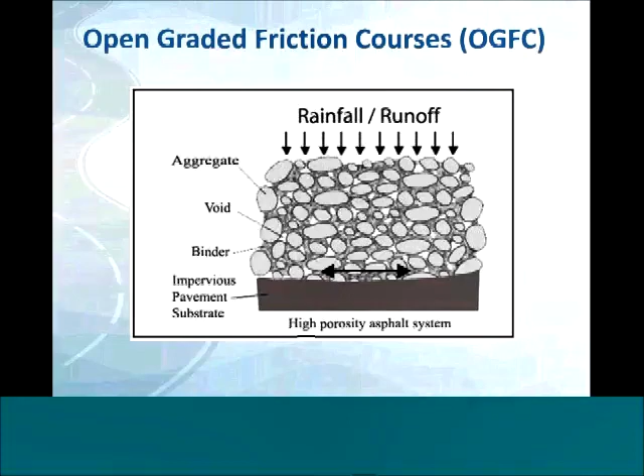The technical working group meets annually to determine the tasks that the center will undertake each year. And for the last two years, the technical working group has supported two communities of practice, one on environmental justice and this one on stormwater management.

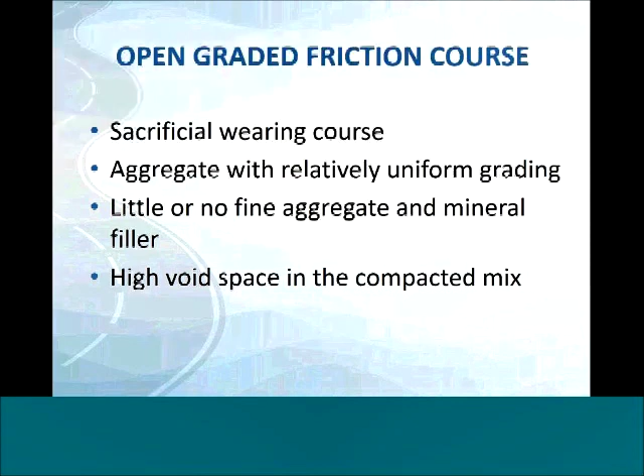The primary goal of both of these communities of practice is to provide a gathering point for practitioners on pressing issues and a way to regularly engage through webinars, conference calls, and other online forums in order to share best practices and lessons learned. Today's webinar is the first in a series that will be conducted in the coming months, and we're also preparing a white paper on the state of the practice that will be published soon.

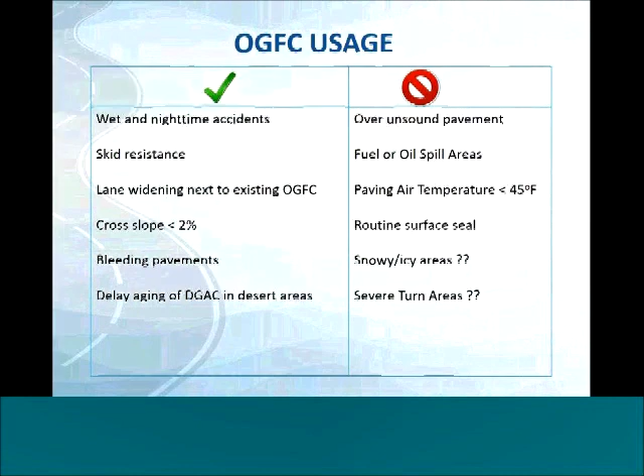This forum is made up of stormwater experts from various state DOTs across the country to offer a varied viewpoint of what water quality and stormwater issues are pressing in their part of the country. Federal Highway appreciates all the hard work and expertise the group has to offer in terms of stormwater and water quality. Again, thank you so much for tuning into this exciting webinar.

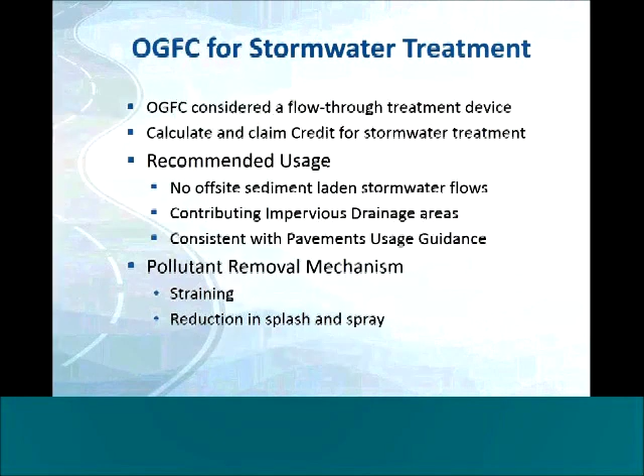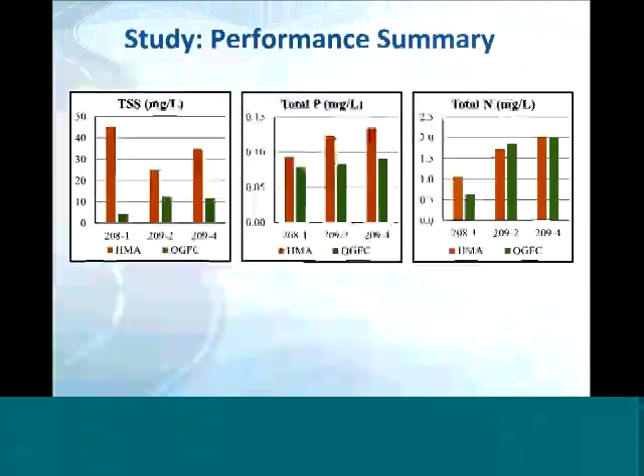For the next hour, you will hear from our presenters who will provide you with information on the effective, efficient, and innovative BMPs that their DOT stormwater management programs have explored and utilized. DOT stormwater programs have experienced increasing responsibilities spanning environmental and program planning, design, permitting, construction, and operations and maintenance. In this web forum, we will discuss innovative solutions that promote surface water quality protection.

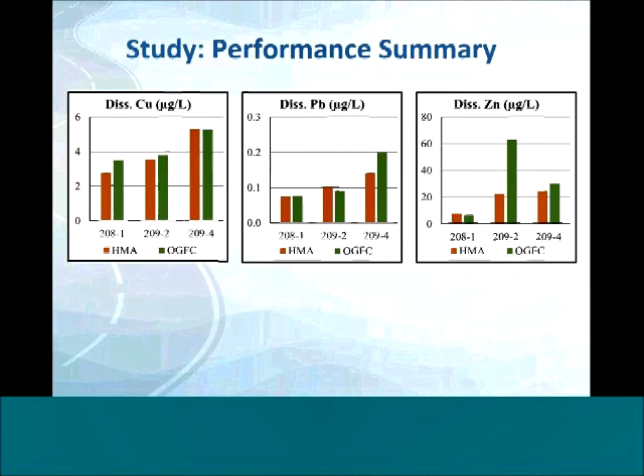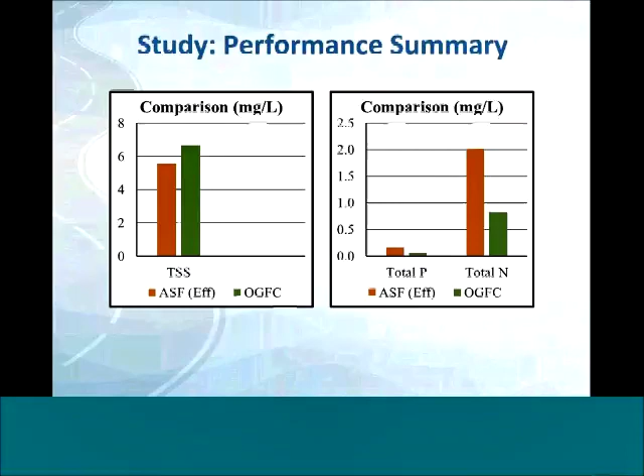During the web forum, we will cover open graded friction course, its benefits, usage, and potential as a water quality treatment BMP; innovative roadside BMPs that fit within the linear transportation system; the importance of infiltration and current research to support this treatment; and winter storm management practices that will measure performance for TMDL and regulatory requirements.

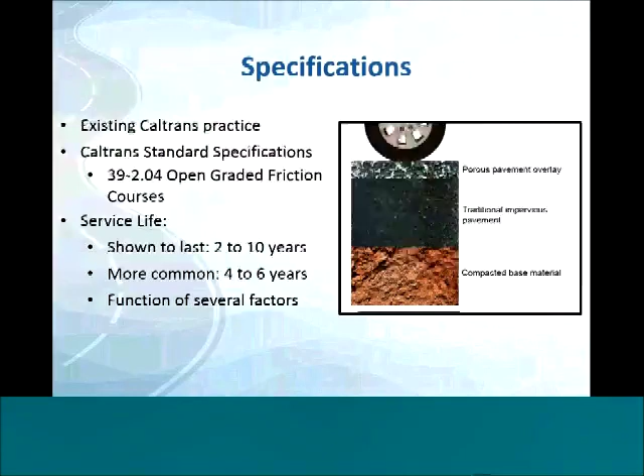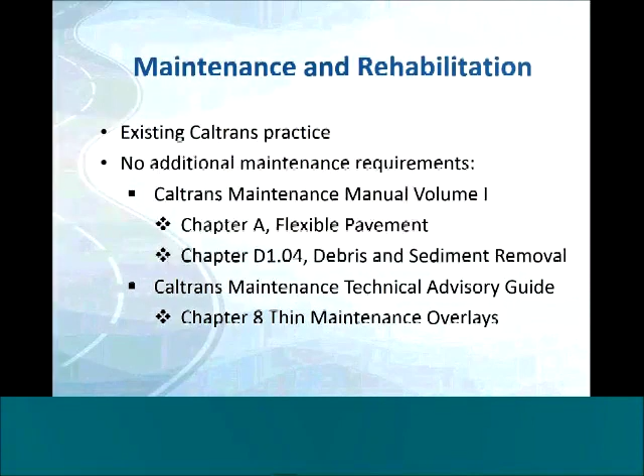Our presenters are Bhaskar Joshi with the California Department of Transportation, Gianna Ratcliffe with Washington State Department of Transportation, and Nick Tiedegan with the Minnesota Department of Transportation. I will be moderating today's session. For the next hour, we will hear the presenters describe their programs and then take your questions.

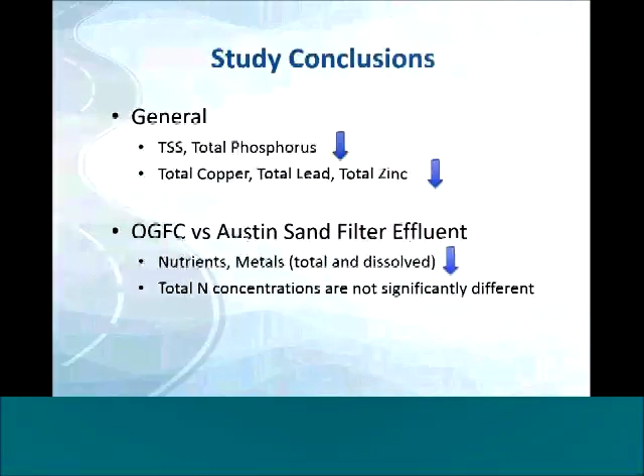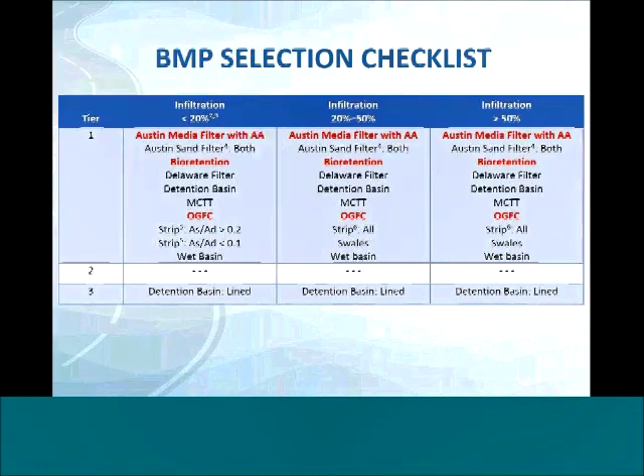So the first slide you can see now on the screen is almost a cartoon depiction of an open graded friction course, and it shows a fairly porous layer of asphalt on top of an impervious pavement surface, which could be asphalt or concrete. The way it works is when there is rainfall or runoff on the surface, it goes through the voids in the pore spaces, and then it laterally travels towards the edge of the pavement.

I'm sure you've all seen great photos of cars driving by on regular pavement and then on open graded pavement, and also experienced firsthand riding on these two types of surfaces. You can almost see nothing if it's a heavy rainstorm and you're driving on regular pavement, you cannot see anything, and then you go onto pervious pavement, and it's a difference of day and night. So that's how normally we experience this, but there is much more going on underneath.

As you see on the next slide, we have in California been using open graded friction courses for a long time, and we have a usage guide for open graded friction course. In fact, there are several thousand miles of open graded friction course pavement in California, and we have gone back and looked at how long we've been using this kind of pavement. It seems starting from the 70s almost, maybe even earlier. That's what our records show.

Next, if you see on the next slide, we have a lot of discussion on what are the benefits of this kind of pavement. You see roadway safety. It has good frictional characteristics, so your stopping distances are smaller, lower. You have high visibility during rainstorms. The contrast in pavement markings is higher, again, during rainstorm periods. Drainage is improved. Surface friction, of course, is improved. And then for environmental benefits, we talk about noise reduction, a lot of talk about noise reduction.

And then what about stormwater treatment? This has been a more recent phenomenon where people have been talking about this pavement also being deployed for improving stormwater quality. That's where this presentation is directed. A lot of studies have been done, and we have had experience in California with a study which I'll talk about in later slides.

As far as usage of OGFC, or open-graded friction course, or open-graded asphalt pavement, as it's also sometimes referred to - on the next slide, mostly this is common across various jurisdictions where OGFC or OGAC is used: for new construction, major rehabilitations, maintenance overlays, and generally where traffic volumes are high. Also, in our guidance, it should be used at least in moderate to heavy rainfall areas. Obviously, there is not much advantage to using it in a desert environment. Generally, it specifies that OGFC should be used for the full width of the travelway and extend out onto the shoulder at least 1 foot, and preferably all through the shoulder. So that's the kind of usage guidance we have.

Or in desert areas, to delay aging of the regular dense graded asphalt concrete, or DGAC. It's not to be used on unsound pavement or where there are spill areas with dripping oil or fuel from slow or stopped vehicles, which can damage the asphalt and cause it to soften. Paving temperatures are restricted to less than 45 degrees Fahrenheit, and it's not to be used as a surface seal.

In snowy and icy areas, there have been different opinions. In the literature, and in some jurisdictions, it has been used successfully in snowy and icy areas, provided you don't have heavy use of studded tires or intense snowplow usage, because that can cause deterioration of the pavement.

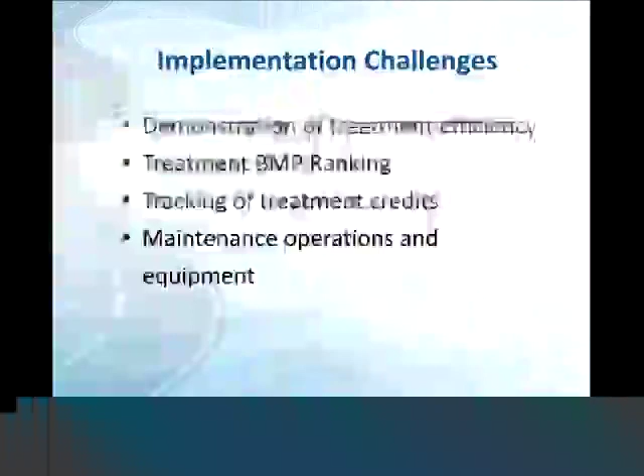Also, in areas of severe turning movements like ramps or parking areas, it might not be a very good use. Our guidance also requires that if you want to use this pervious pavement on a bridge deck, it requires special approval from our structures design people, although there is evidence in the literature that it has been used successfully on bridge decks. So that's as far as the usage guidance in our pavement section.

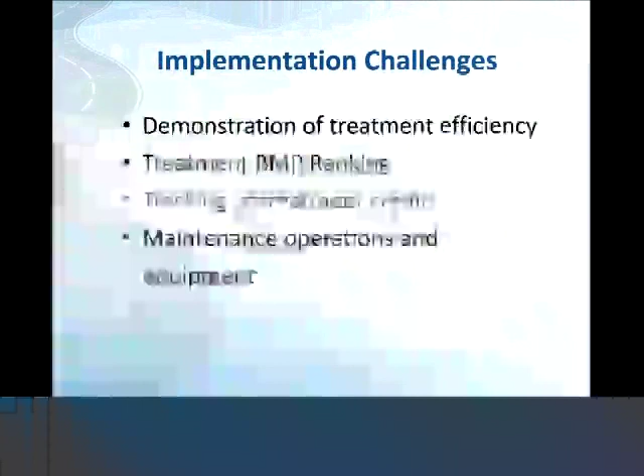Until recently, this guide, which also lists BMPs that have been approved for use, did not list open graded friction course as an approved BMP. So we did a study on open graded friction courses, and I'll talk about this study in just a few slides.

But it has recommended uses, like you shouldn't have sediment-laden stormwater flows or impervious drainage areas, and it has a recommendation saying it should be consistent with pavement usage guidance, which I showed you earlier a few slides back.

It talks about how open graded friction course is successful in removing pollutants, mostly by straining and reduction in splash and spray. So there is general design guidance in this manual now, and we have open graded friction course as an approved BMP in our guidance.

It's very valuable for us because in our current permit we are required to treat 1,650 acres of right-of-way annually, mostly in TMDL watersheds, which is total maximum daily load watersheds. This is a very difficult target to achieve unless we have innovative BMPs like OGFC, because we have restricted right-of-way and limited opportunities to put in structural BMPs everywhere.

While this BMP has multiple advantages, the approval process took a long time to convince people that this is indeed an option that has stormwater treatment benefits. We did a study on this open graded friction course. I'll talk about it next.

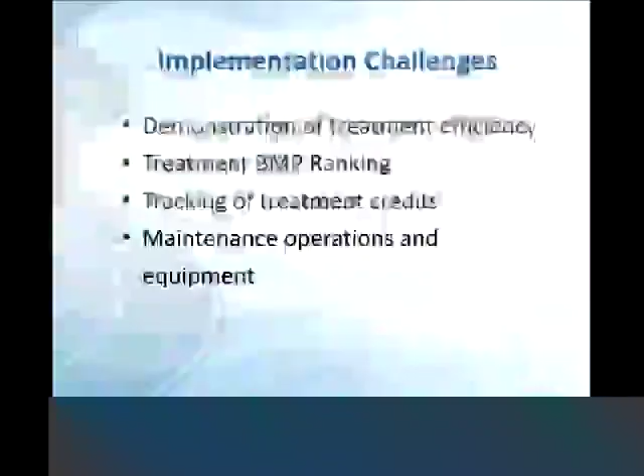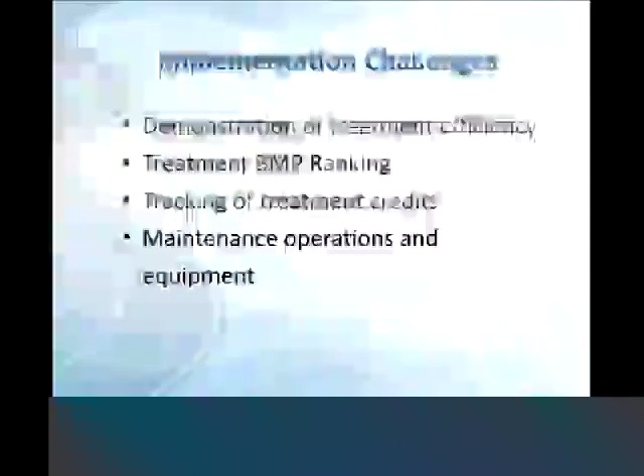But for stormwater quality benefit, of course, you would need to maintain it in some way. There are various options using either sweepers, or vacuum sweepers, or water high pressure cleaners, or there are specialized cleaning vehicles available, which, if you want to maintain the permeability over a longer period of time, is the kind of maintenance that would be needed. But regardless, even if it is not maintained intensively, it will function as a lower permeability stormwater treatment device, and that is something that could be investigated further.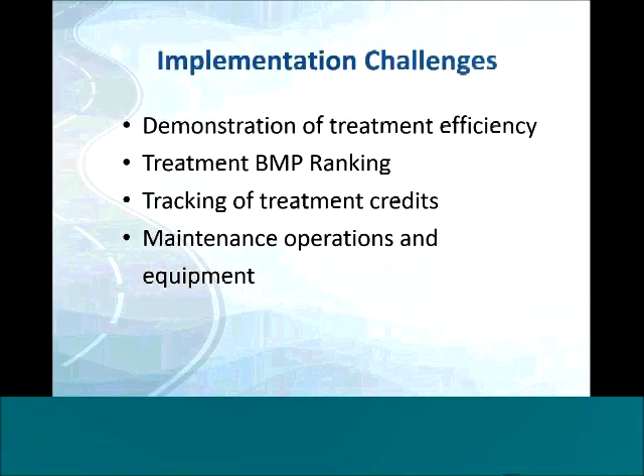Then there's the ranking of these BMPs, which I showed on the previous slide. It took us a considerable amount of effort to rank OGFC, should it be on tier 1, 2, or 3. This entire study, which lasted for 4 years, based on these results, we were able to rank it and place it in the selection matrix. That part is done.

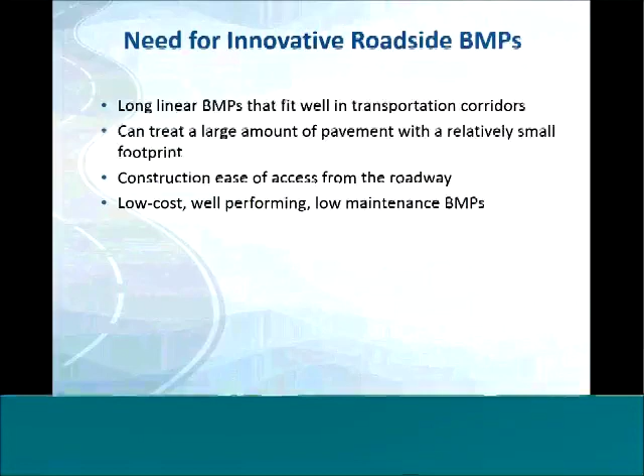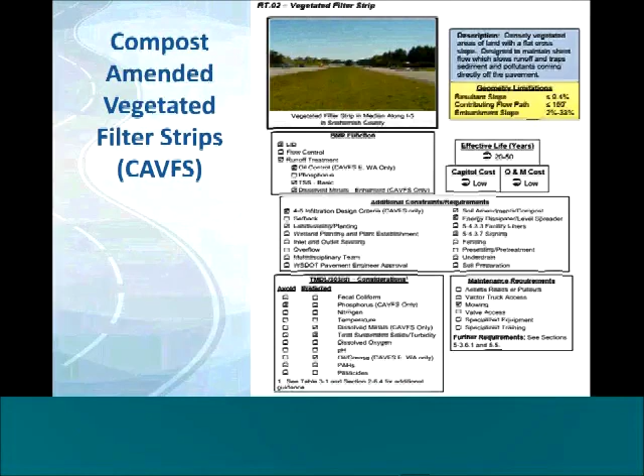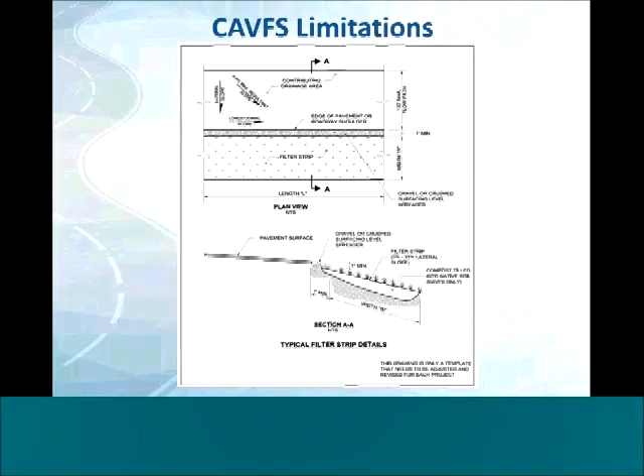Treatment credits: if you place OGFC somewhere in a TMDL watershed or even outside a TMDL watershed, you get some credit for treatment, or claim credit, and then how do you track it? How do you mark the BMP, where does it start and where does it end? And if you have to maintain or rehabilitate it, the division of maintenance needs to track where this BMP is that we have taken credit for. If they go in and remove it or replace it with something else, the credit has to be reduced from our treatment credit. So that tracking is still a matter of debate, how to do that and who is going to do it. How will we, over a longer period of time, make sure that where we place OGFC is not replaced with something else, or if it is replaced, then we know it has been replaced. So that is something we are still working out.

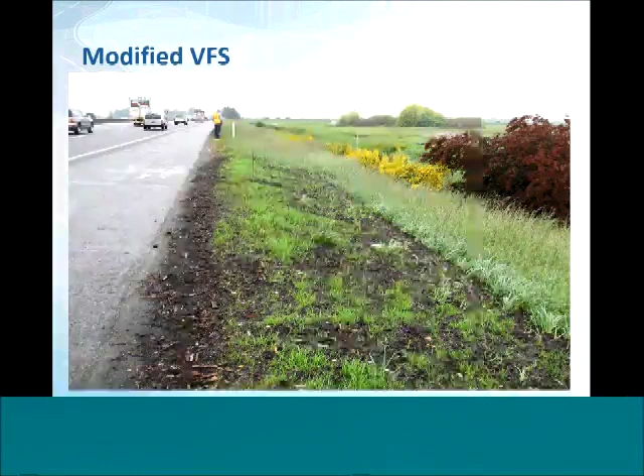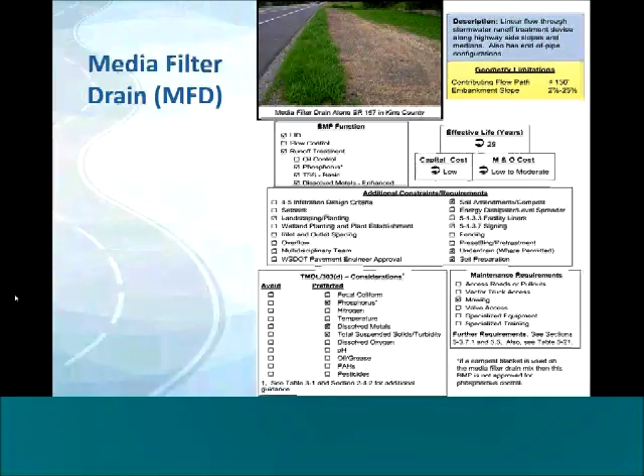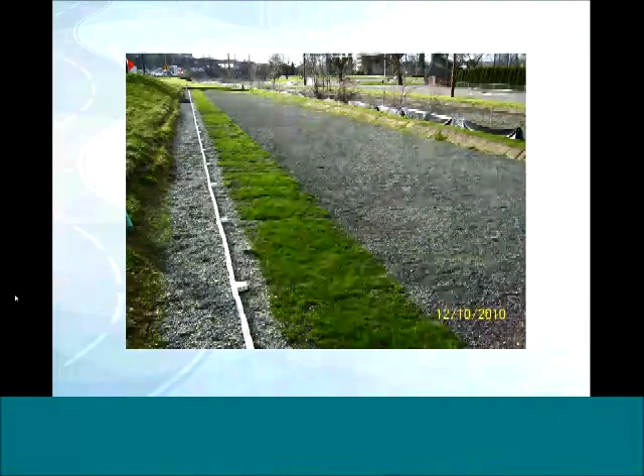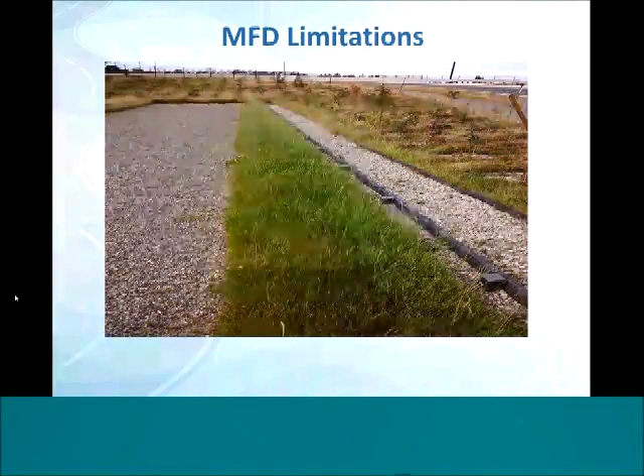And then the final issue is maintenance, operations, and equipment. What kind of maintenance operations are needed to keep this BMP functioning at the efficiency we claim it to be? If it gets clogged and is no longer functional, then we should not be taking credit for it. To make sure that happens, do we need specialized equipment? Is there a maintenance schedule that needs to be adhered to? And how do we keep testing after installation to make sure these BMPs function as designed? So that's the kind of challenges we have in front of us, although the BMP is approved and has been proven effective for stormwater treatment not only in California but in other jurisdictions, not just in the United States but also in Europe and other places around the world.

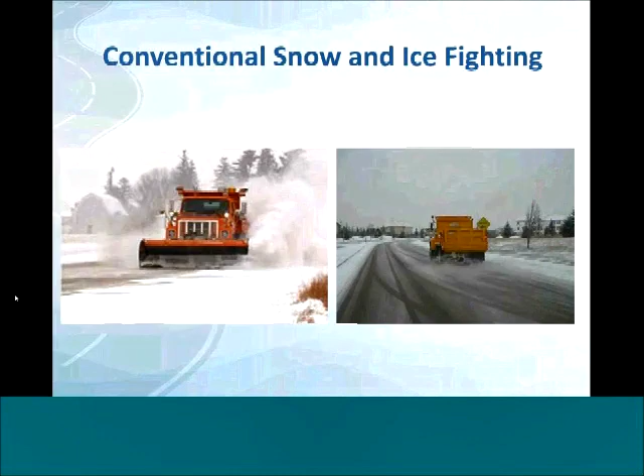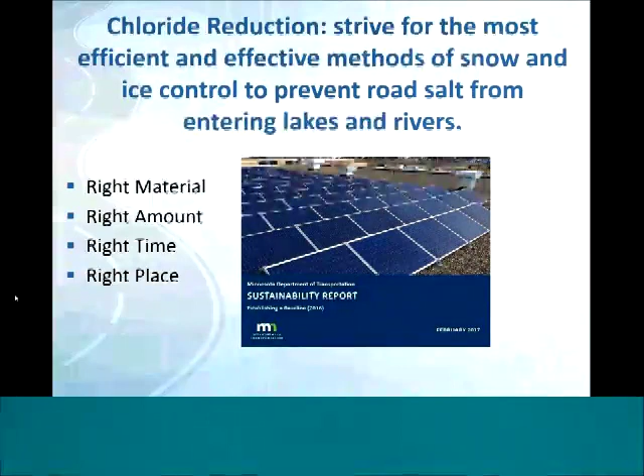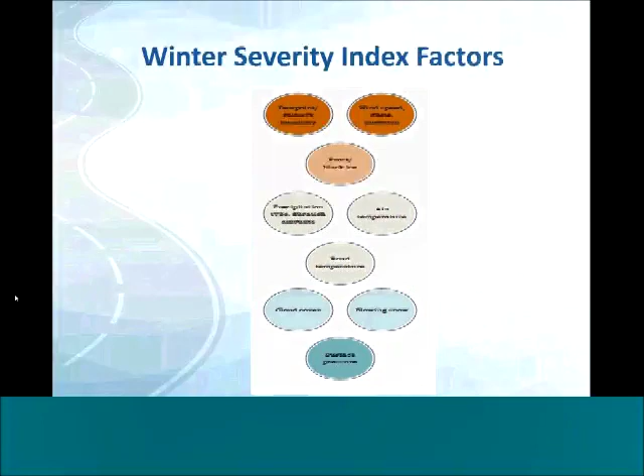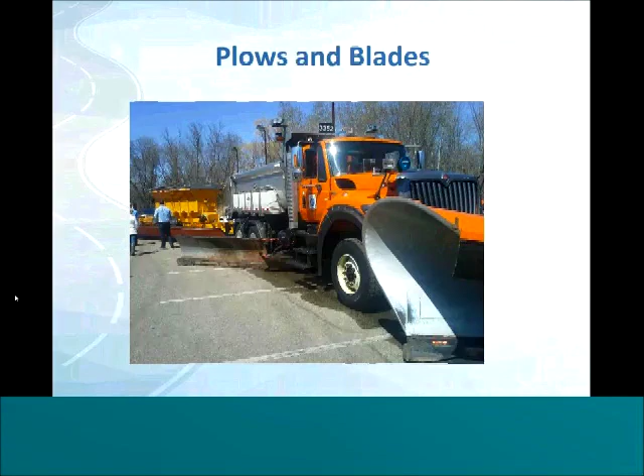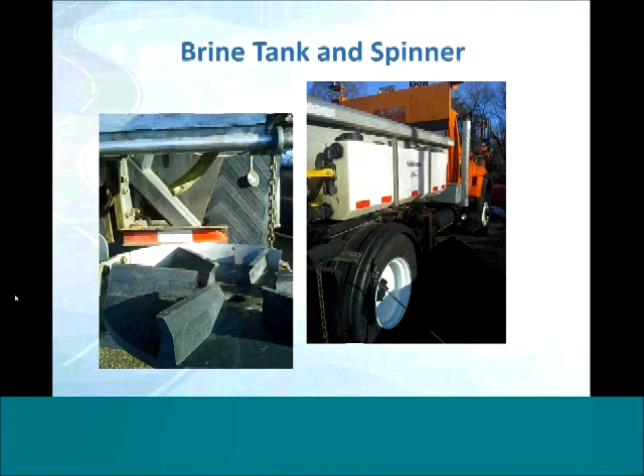We've gone to a lot of liquid methods recently, and we've upgraded most of our trucks to have a brine tank. The brine tank is a salt solution, a wetted salt solution that we add to the granular dry salt. Before the granular dry salt gets shot off the spinner here, there's a little tube there - I don't know if you can see it on the left above the orange and white marker. We add the salt brine to it, and the brine helps the salt stick to the pavement better, so it's not bouncing off.

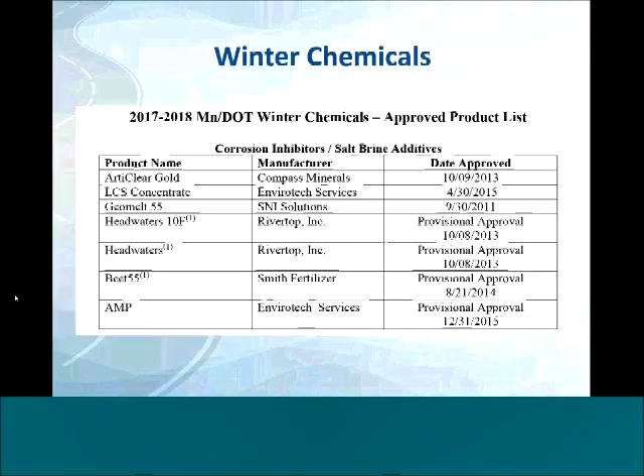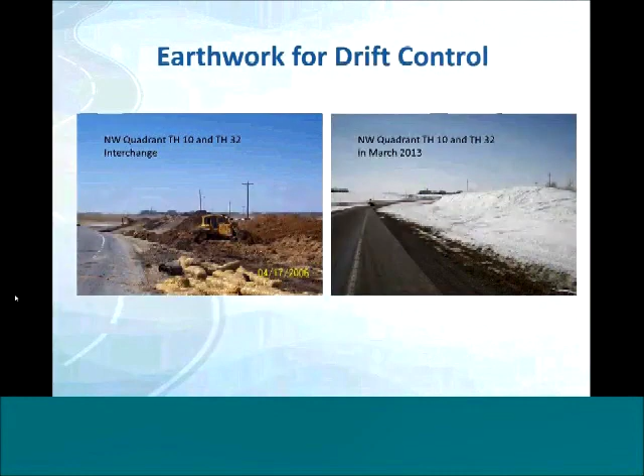Another liquid practice we use is anti-icing. Before the storm comes, we go out and apply this brine to the pavement. This helps prevent the ice from bonding to the pavement, making removal easier, and therefore we have to use less chemicals at the end of the day.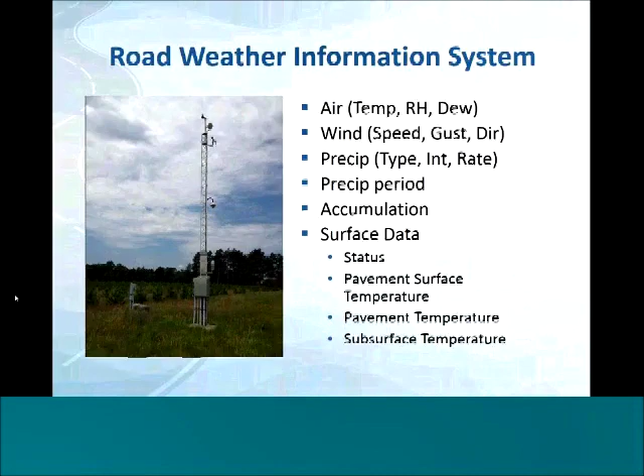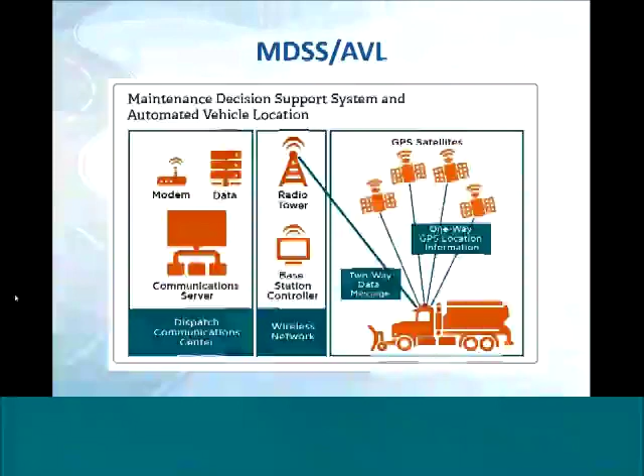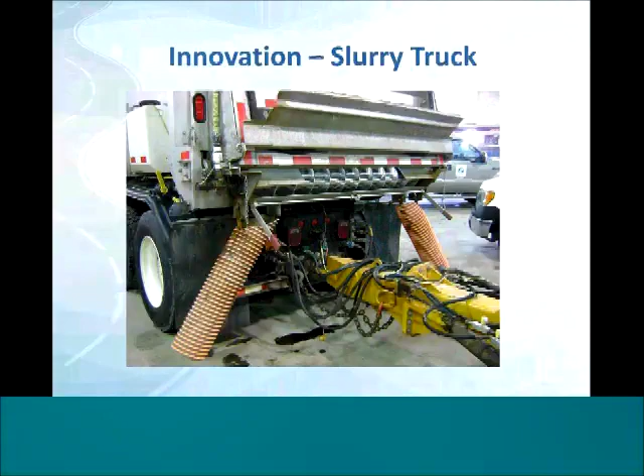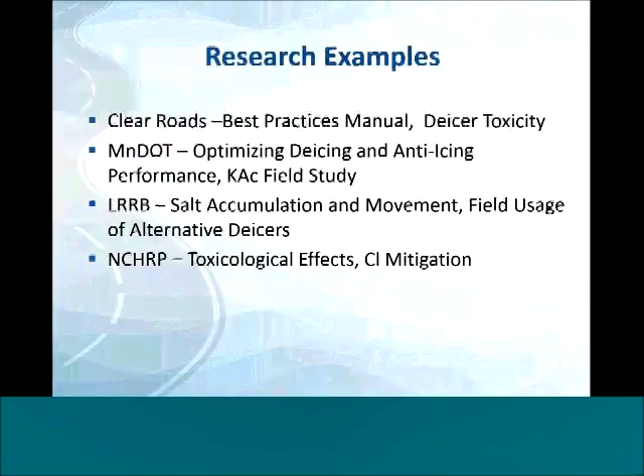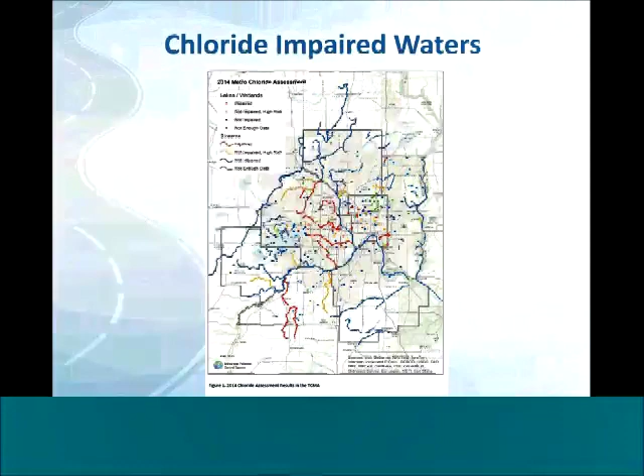We also use other chemicals such as magnesium chloride in very specialized situations. We have some non-chloride chemicals in the next slide. Potassium acetate we use on our fixed bridge de-icing locations, and we're also looking at using potassium acetate on our route now. So we're looking at some of the non-chloride chemicals.

Next, please. We also do some earthwork to help control where the snow is going to be trapped at. Instead of trapping it out in the middle of the highway, we can now trap it in the ditch a little bit better. And then also things like the hardware in the right-of-way also can affect where the snow ends up.